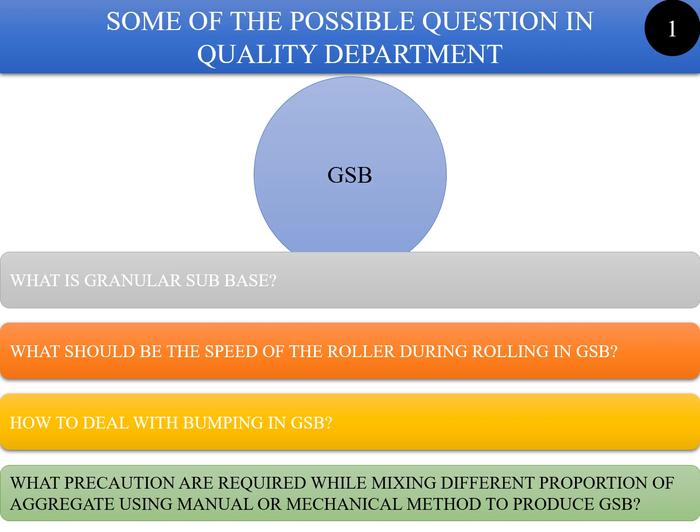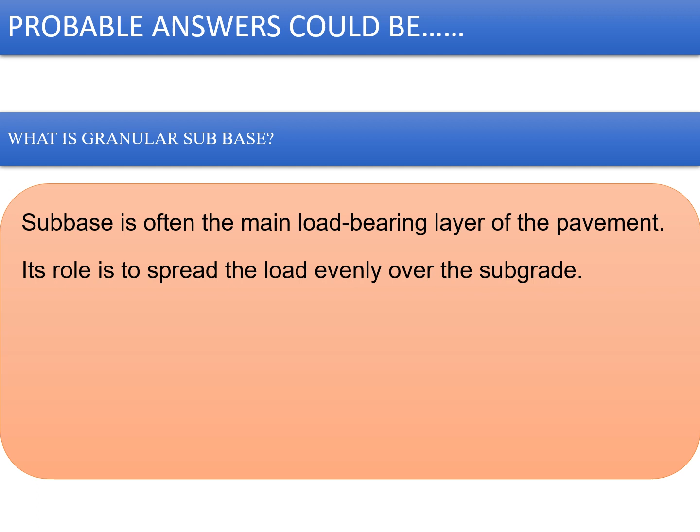The first question is, what is GSB or what is granular subbase? Subbase is often the main load bearing layer of the pavement. Its role is to spread the load evenly over the subgrade. The materials used may be either unbound granular or cement bound. The quality of the subbase is very important for the useful life of the road.

And this subbase is often known as granular subbase, which can be a natural material or it can be a crusher material mixed in required proportions using 40, 20, 10 mm crushed aggregate or crushed sand.

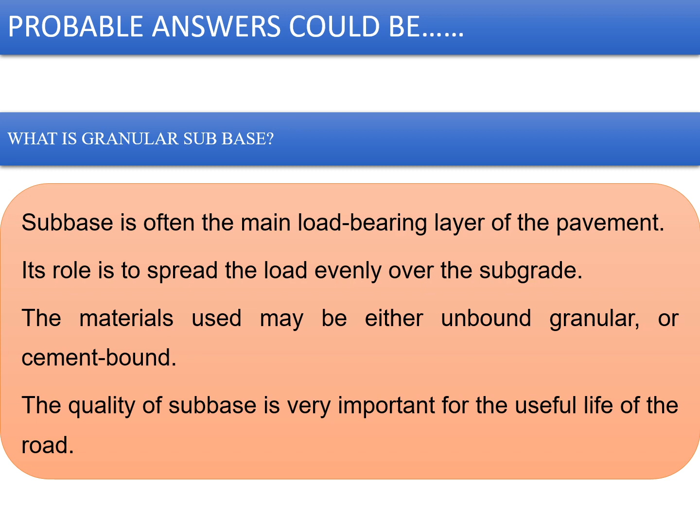The next question is, what should be the speed of the roller during rolling in the GSB? And the quick answer is, the speed of the roller shall not exceed 5 kilometers per hour. Why it should not exceed, we have already covered while talking about the controls required in GSB in our modules. But to make you understand, when the speed increases, the impact reduces and you will end up making more passes than the required number of passes.

For example, if you are able to roll a GSB layer by passing 3 times, and if you increase the speed, you might have to take more than 3 passes, that is 4, 5 or 6, depending upon the speed at which you are taking your roller.

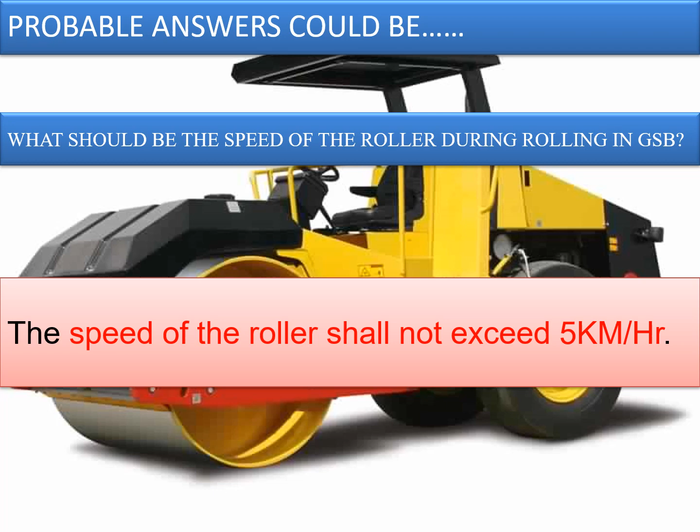Next question is how to deal with bumping in GSB. Bumping, if found, shall be rectified before proceeding to the next layer, and for rectification either you allow it to dry by opening the surface, or if you don't have time, if your project is fast track, the best way is to remove the material and replace it with fresh material.

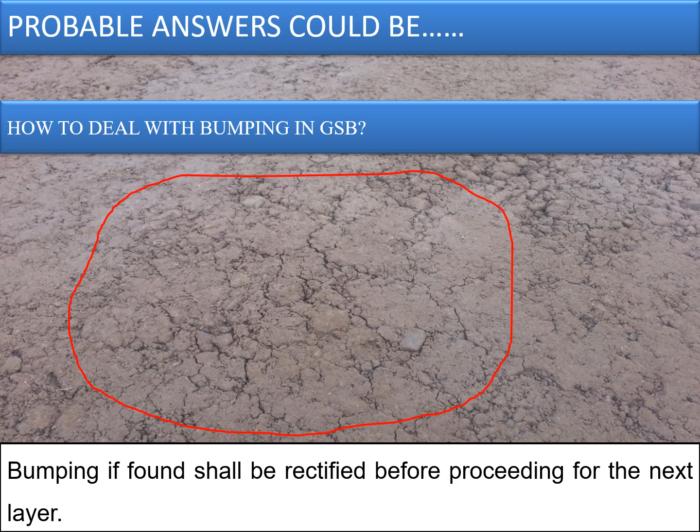What precautions are required while mixing different proportions of aggregate using manual or mechanical method to produce GSB? When production is done by mixing the different types of crushed aggregates in designated volume or weight, then the calibration needs to be ascertained first before starting the production of the GSB.

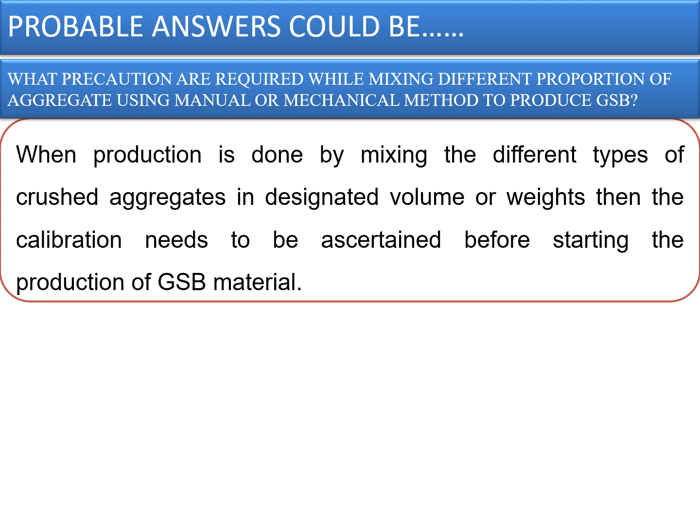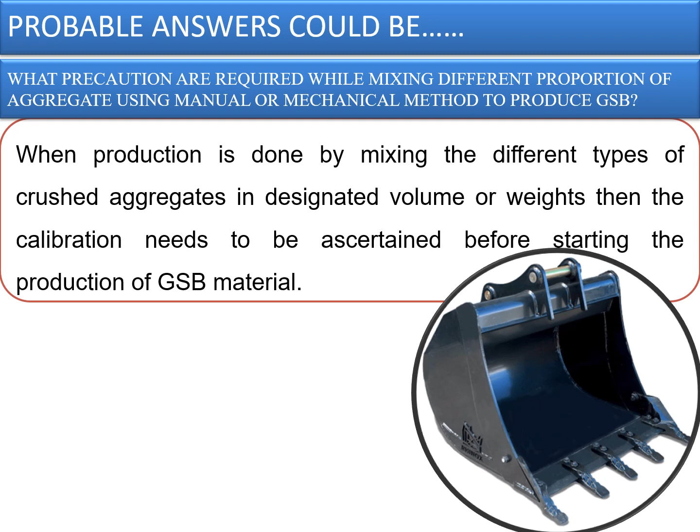Then the second precaution, if considered in volume, is the proportions need to be defined in such a way that it will be easy to calculate the number of buckets in terms of the percentage in which it is being mixed. And when it is mechanical mixing, then you need not worry about the percentage of proportioning of aggregates. Whatever it is, it will be covered during the process of calibration only.

But mainly when you are doing volume mixing, you must ensure that your GSB material, which is a mixture of 40, 20, 10 mm and dust, is mixed in a proportion which can be easily converted into multiples of 1, so that 1 bucket of 40 mm, 2 buckets of 20 mm, 3 buckets of your 10 mm and 4 buckets of dust. In that fashion, you can always mix in order to get 100% of the mixing.

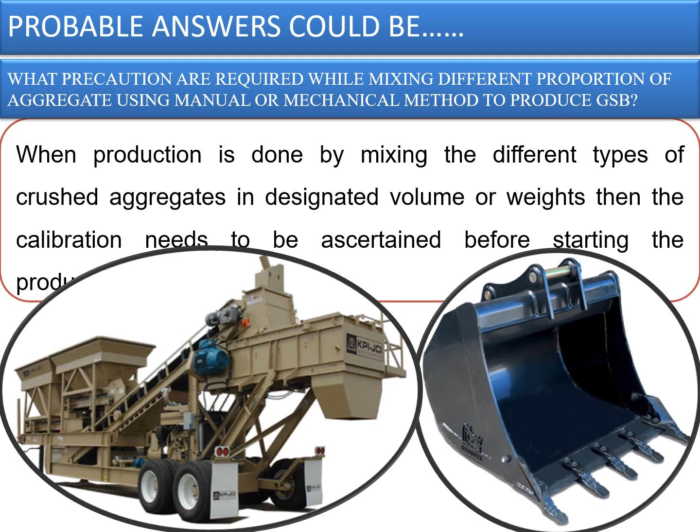Coming to the second set of questions related to QAQC in GSB. What should be the physical properties of GSB? What properties of aggregates will meet the requirement of GSB? What is the function of different gradings of GSB? What is the range of moisture content one should maintain during the execution of GSB?

What should be the physical properties of GSB? The physical properties of GSB are: it should have water absorption less than 2%, it should have CBR more than 30%, plasticity index less than 6, aggregate impact value maximum 40, and liquid limit less than 25. Any material which is meeting these requirements shall be used as GSB material, provided it is in line with the grading requirement.

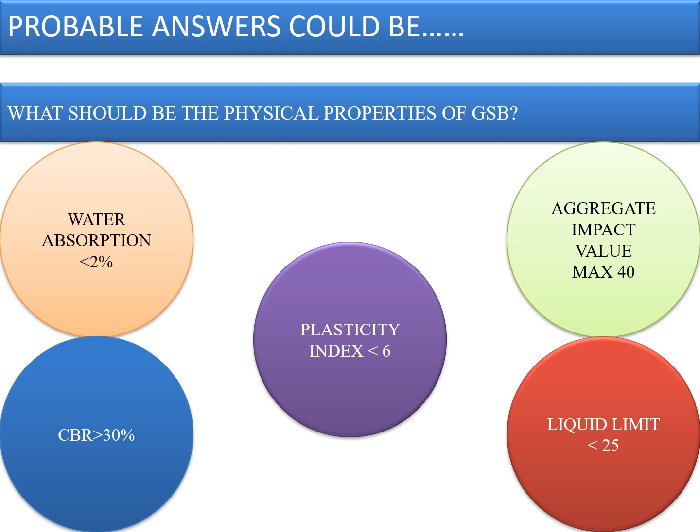What properties of aggregates will meet the requirement of GSB? When we are talking specifically about aggregates, water absorption should be less than 2% and the aggregate impact value should be maximum 40. So if the aggregate is having an impact value of maximum 40 and water absorption less than 2, then those aggregates can be used as an ingredient for making the GSB material.

What is the function of different gradings of GSB? We have 6 gradings of GSB: 1, 2, 3, 4, 5 and 6. Out of these 6 gradings, for the lower subbase, preferably grading 3 and 4 are better, and for upper subbase and drainage layers, grading 5 and 6 is commonly used.

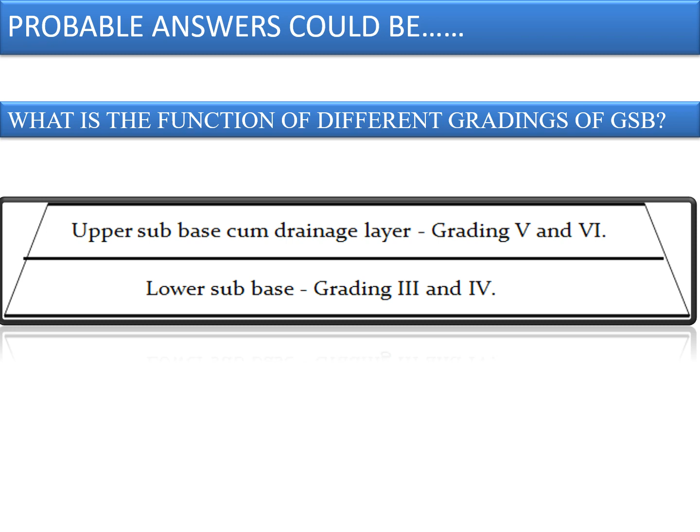What is the range of moisture content one should maintain during the execution of the GSB? The range of moisture content should be optimum +1 -2. It's always optimum +1 -2, and it can be checked by making a ball with hands taking a sample of soil, or you can use a rapid moisture meter to check the moisture content of the GSB materials.

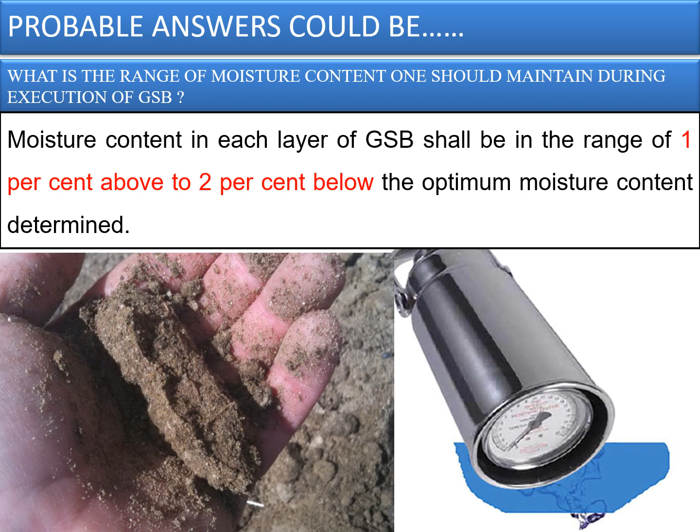Coming to the third set of questions in GSB, what is the importance of grader in laying of GSB? What is the importance of level checking in GSB? What precautions are required during rolling of GSB? And what are the steps involved in the design of GSB?

The first question is, what is the importance of grader in GSB laying? The grader does the spreading of GSB materials. It helps you to maintain the required camber, and it also helps you to get uniformity in the mixing, so that later on there won't be any accumulation of fines at a particular place, which will ultimately lead you to bumping.

What is the importance of level checking in the GSB? Level checking will help you to identify the high spots and depressions in the bed, so that you can take necessary rectification works then and there only. It will help you to check whether the camber is maintained or not, and it will also give you an indication about the achievement of top level, so that further levels can be taken care of accordingly.

If the top level is not met, if the top level is reduced by say 30 millimeters or 40 millimeters, then to reach the finished road level, you have to spend more by increasing the height of WMM, or if you miss the WMM also, then you have to increase the height of the DBM or BC. So that is why it is always important to check the top level of each section, starting from embankment, subgrade, GSB, WMM, DBM and BC.

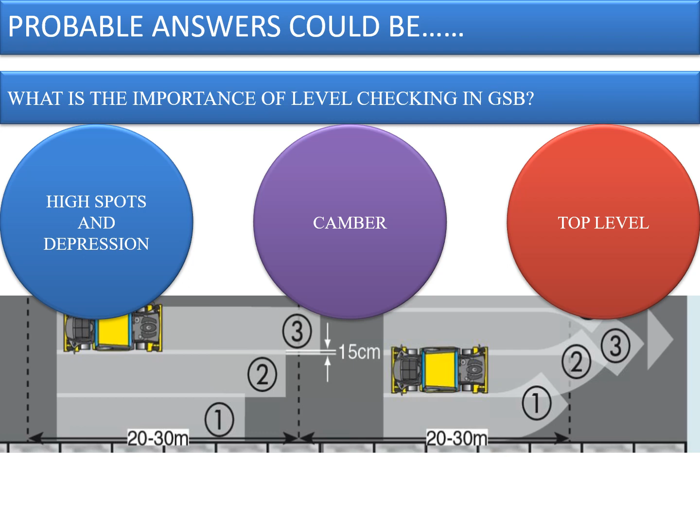What precautions are required during rolling of GSB? During rolling of GSB, the first precaution required is one must consider the overlapping zone. The overlapping must be maintained at least 150 millimeters. The rolling has to start from the edge and move towards the center, and the roller should not apply brakes or stop when on the bed. It's always required to move out of the bed and then stop or take a turning radius, so that there won't be any scratch marks or any stresses developed because of the steering's movement before finally compacting the GSB material.

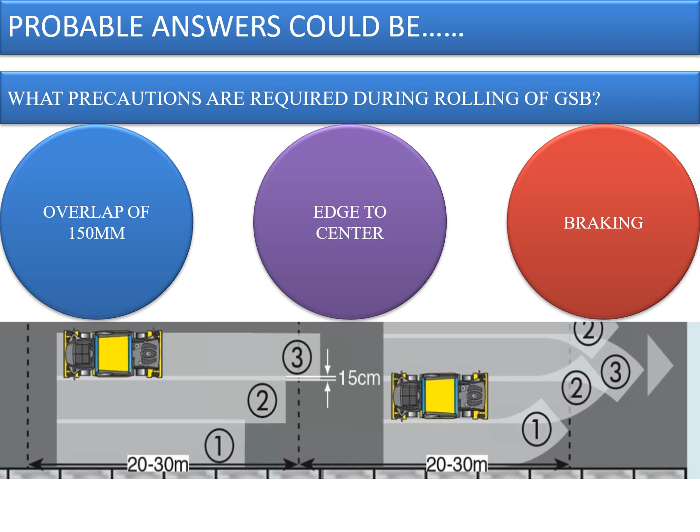What are the steps involved in the design of GSB? The first step is grading. One has to ensure that you achieve the right grading, which is meeting the requirements given in MoRTH Revision 5. Then you need to check the physical properties of the GSB mix as well as the aggregates. Once these two things are done, you need to determine the Proctor value of the GSB mix, which will give you the maximum dry density and optimum moisture content, which is useful in determining the percentage compaction in the field.

So some of the key points one should keep in mind while attending the interview in order to make it a success: they have to be confident while appearing for an interview. They should have their intelligence in control. They should be vigilant enough to understand the questions and answer them accordingly. They have to be innovative, like if they're stuck somewhere, they should know how to come out of that situation. And the answers must be logical, so that while answering they feel confident and satisfied, and at the same time the interviewer also has the same feeling.